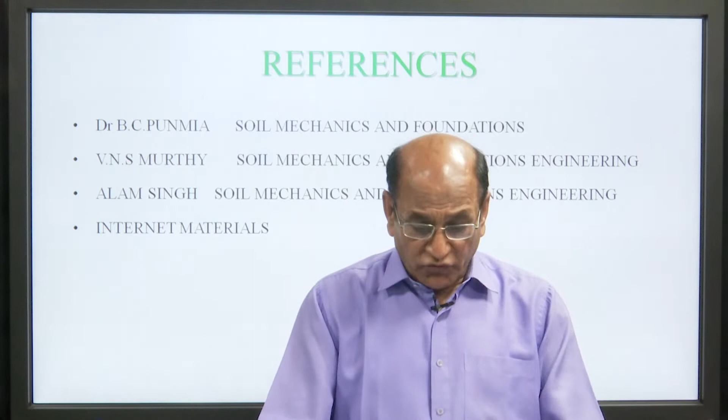References that I have taken: Dr. B.C. Punmia, Soil Mechanics and Foundation; V.N.S. Murthy, Soil Mechanics and Foundation Engineering; Alam Singh, Soil Mechanics and Foundation Engineering; and some material has been taken from the internet.

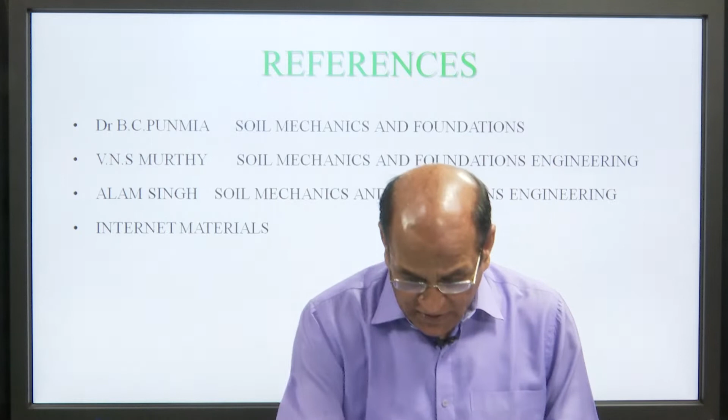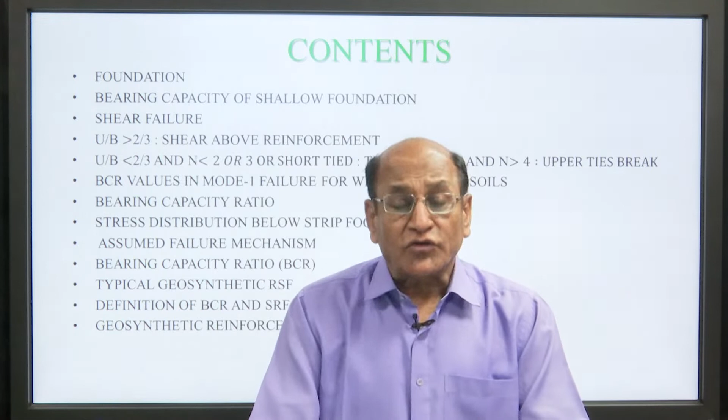The contents: today I will take up foundation, bearing capacity of shallow foundation, shear failure, U by B more than 2 by 3, shear above reinforcement, U by B less than 2 by 3, and N less than 2 or 3 or short tied, tie pulled out, and N more than 4 upper tie break.

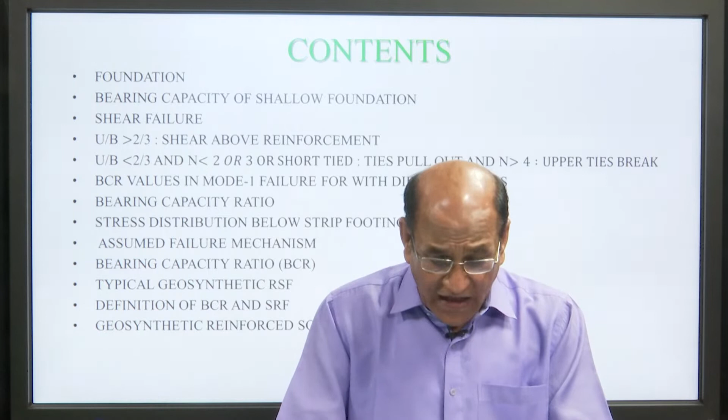BCR value in mode 1 failure for different soils, bearing capacity ratio, stress distribution below strip footing, assumed failure mechanism, bearing capacity ratio, typical geosynthetic, SRF, geosynthetic reinforced soil foundation.

First of all, we will take up foundation. Foundation is a part of a structure that transmits the weight of the structure and load to the ground.

This is the foundation which distributes the load in a larger area, so that the stress developed is lower. The soil does not fail in shear, and settlement is within safe limit.

Broadly, they are classified into two categories: first is shallow foundation, and second is deep foundation. A foundation is shallow if its depth is equal to or less than its width.

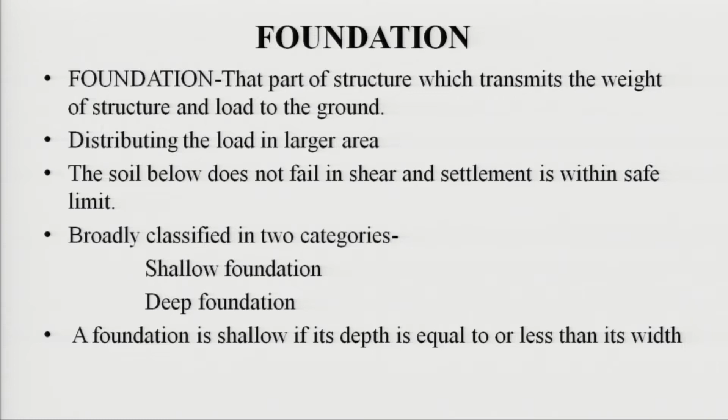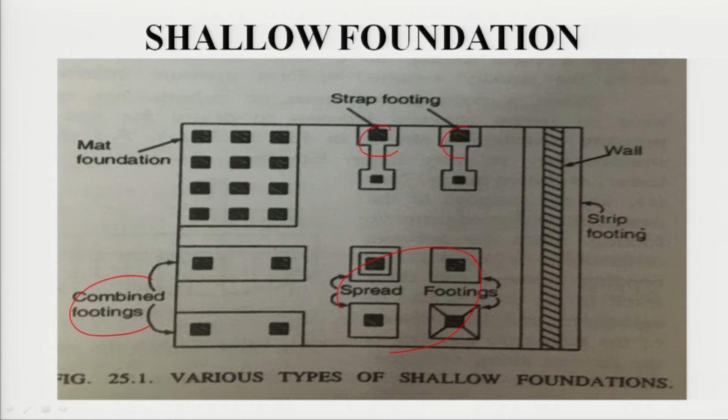We will see in this figure, this is a wall under which there is a strip footing, there is a strap footing like this way, it is quite clear. This is a spread footing like this way. This is a combined footing, combination of all these, and this is a mat foundation, which is provided where the bearing capacity of soil is very low.

Now come to the bearing capacity of shallow foundation. We will discuss Terzaghi's equation for calculating bearing capacity.

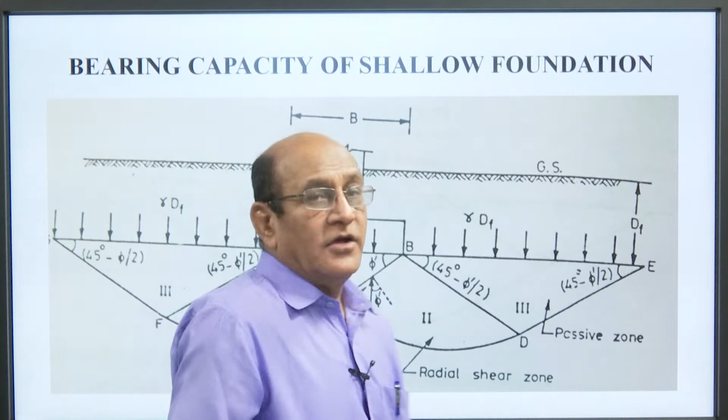Here we can see this is the wall, this is the width of the footing, and here is a loading QU, uniform loads are coming on the soil. There are 5 zones.

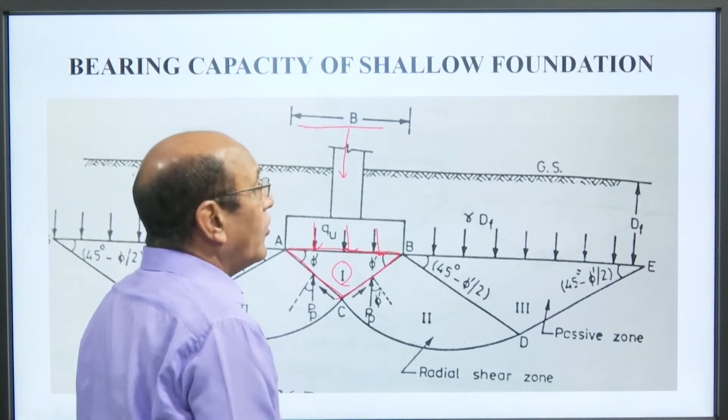The first zone is a wedge type, which is directly underneath the footing. So this is the wedge, and there is no deformation going outside from the edge.

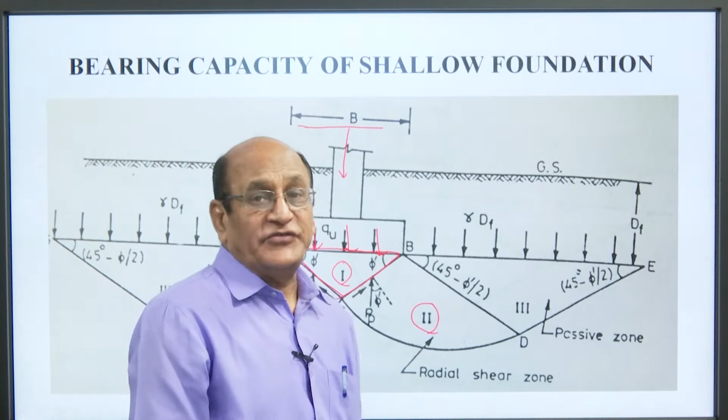Second is the zone of radial shear, in which the radial type of shearing action goes on.

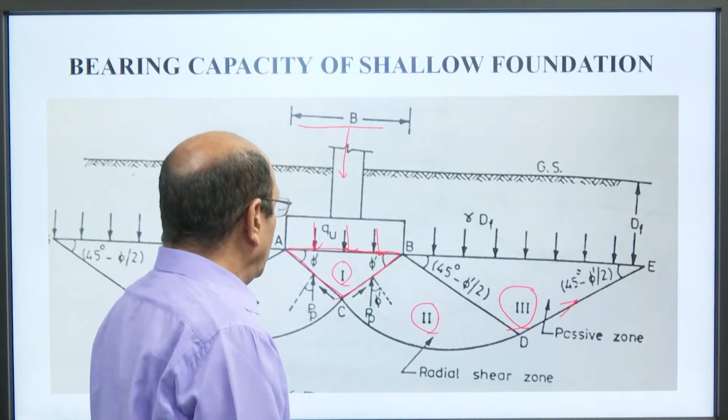The third is a passive zone, in which it works like a linear shear zone. So this is a brief of the bearing capacity of shallow foundation, because whatever we will discuss will be based on this concept.

Now come to the shear failure. The bearing capacity failure is categorized into 3 types. The first is called general shear failure.

The third is punching shear failure, in which the load is coming directly underneath the footing, and deformation or settlement occurs underneath. So we will discuss one by one.

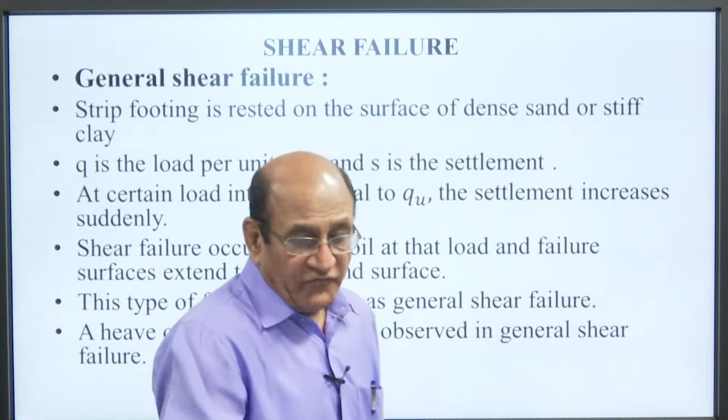First is general shear failure. We can see here, the assumption is a strip footing is rested on the surface of dense sand or stiff clay. Q is the load per unit area, and S is the settlement.

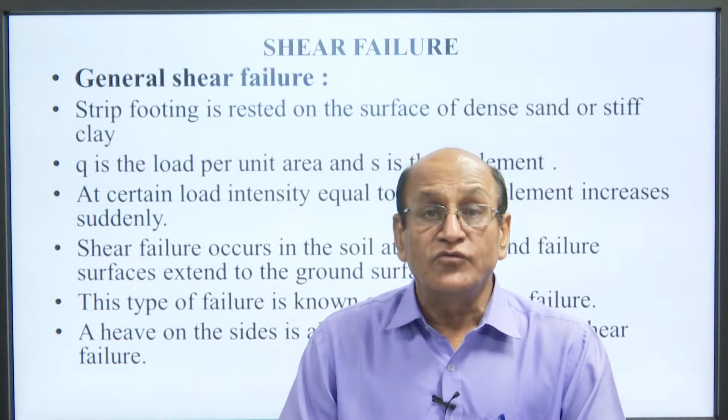At a certain load intensity equal to QU, the settlement increases suddenly. Shear failure occurs in the soil at that load, and the failure surface extends to the ground surface.

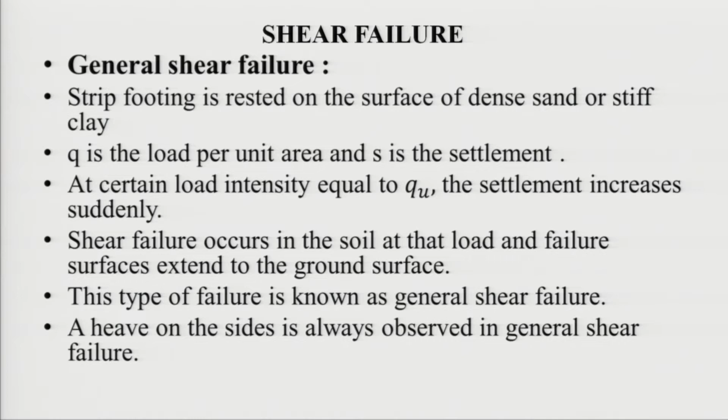This type of failure is known as general shear failure. A heave on the sides is always observed in general shear failure.

So this is about the shear failure. The basic assumption is the footing is rested on the surface of dense sand or stiff clay.

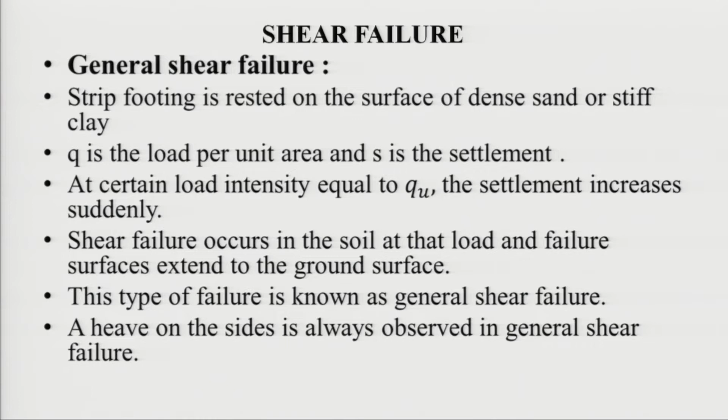Now come to the local shear failure. The strip footing is rested on the surface of medium sand or clay of medium consistency.

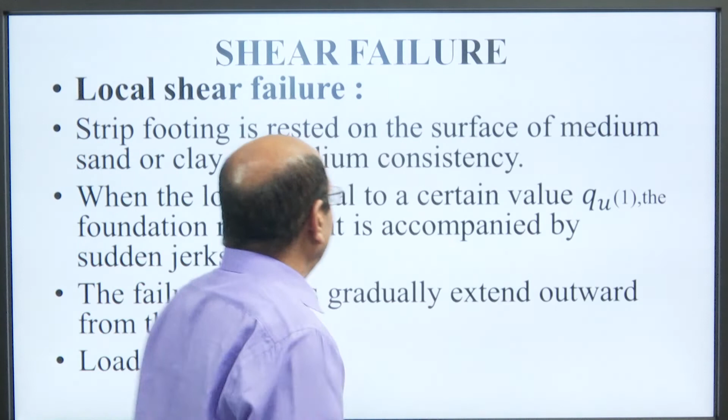When the load is equal to a certain value of QU1, we can see here, this is QU1.

The foundation movement is accompanied by a sudden jerk. The failure surface gradually extends outward from the foundation, as we can see here, extended outside.

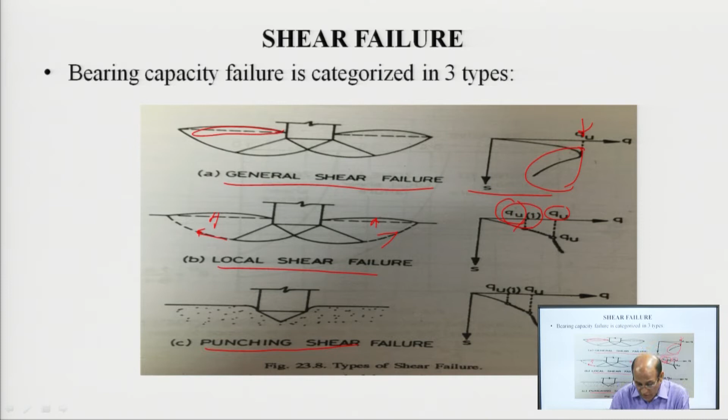In the local shear failure, the failure surface gradually extended outward from the foundation. The load is equal to QU.

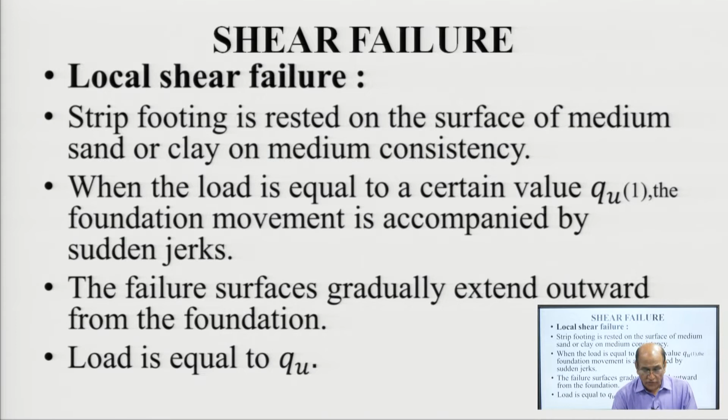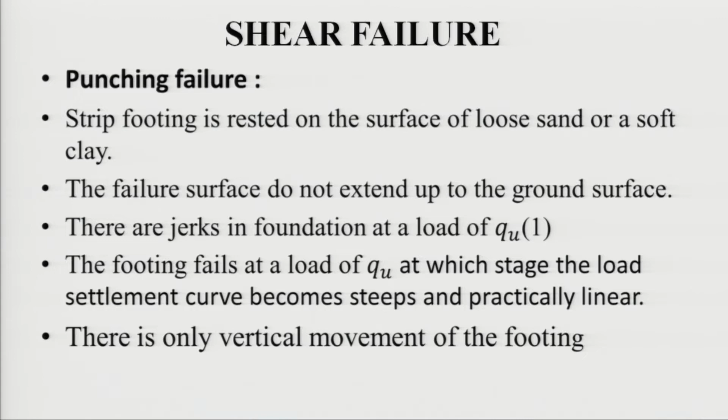Now come to the punching failure. A strip footing is rested on the surface of loose sand or soft clay. The failure surface does not extend up to the ground surface.

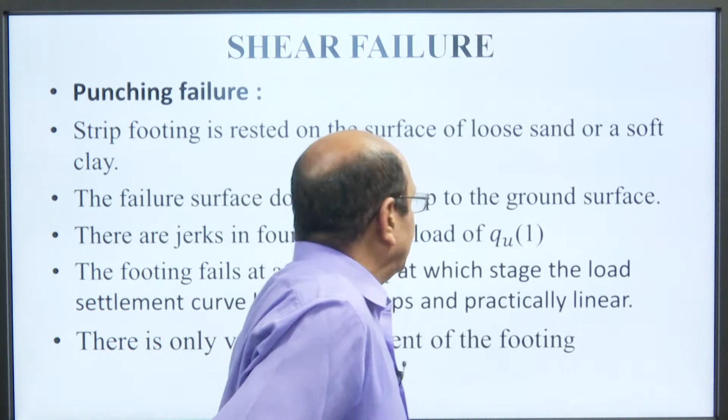There are jerks in the foundation at a load of QU1. Again you can see here, this is the punching failure. So this is the QU1.

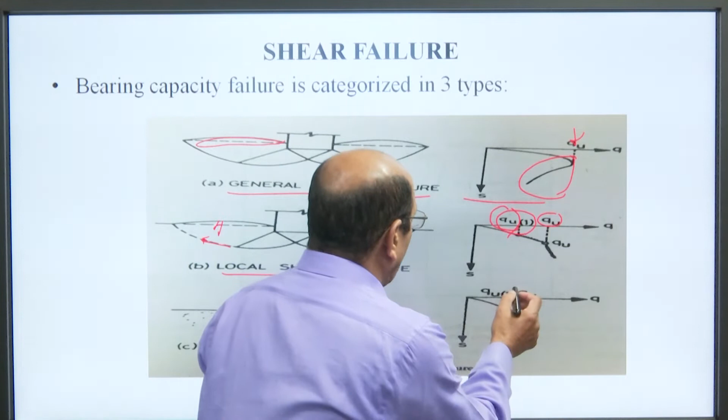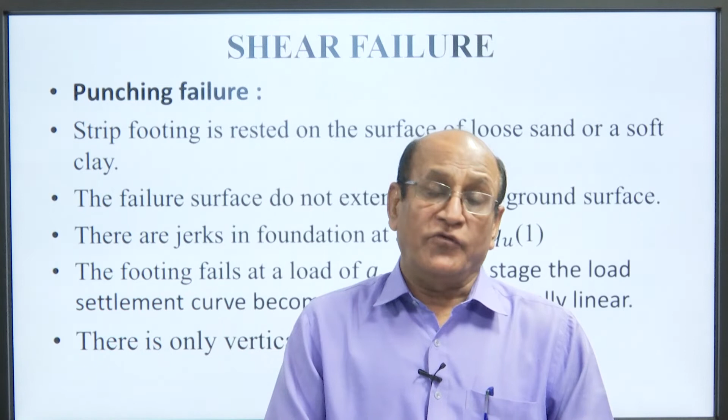The failure surface does not extend up to the ground surface. There are jerks in the foundation at a load of QU1. The footing fails at a load of QU, at which stage the load settlement curve becomes steep and practically linear. There is only vertical movement of the footing, there is no horizontal movement of the footing.

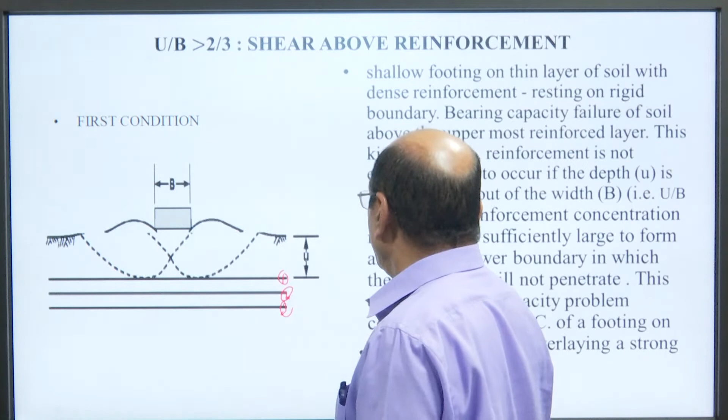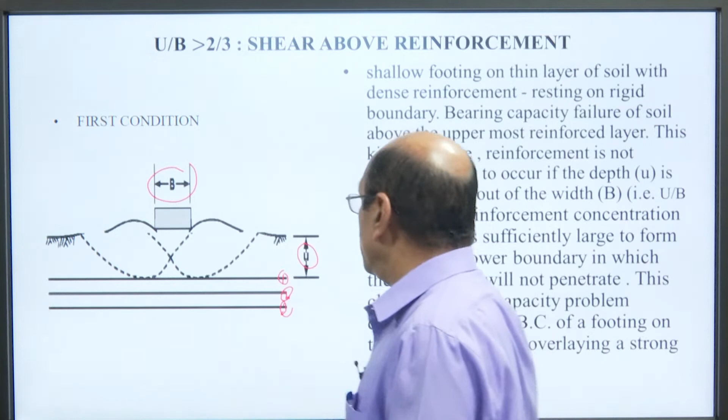We can see here these are the reinforcement provided below the pressure bulb, we can say, and the depth of this first reinforcement layer is U, and this is the width of the foundation. So U by B should be more than 2/3, or you can say 0.67.

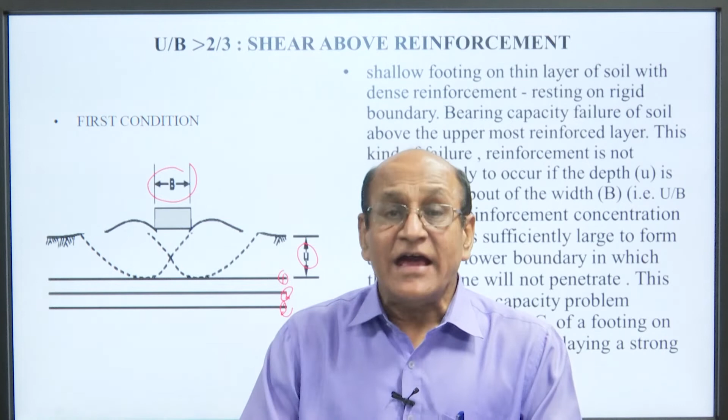So we can see the shallow foundation on thin layer of soil with a dense reinforcement resting on a rigid boundary. Bearing capacity failure of soil occurs above the uppermost reinforced layer.

This kind of failure, reinforcement is not effective, likely to occur if the depth U is greater than about the width, means U by B is greater than 2/3.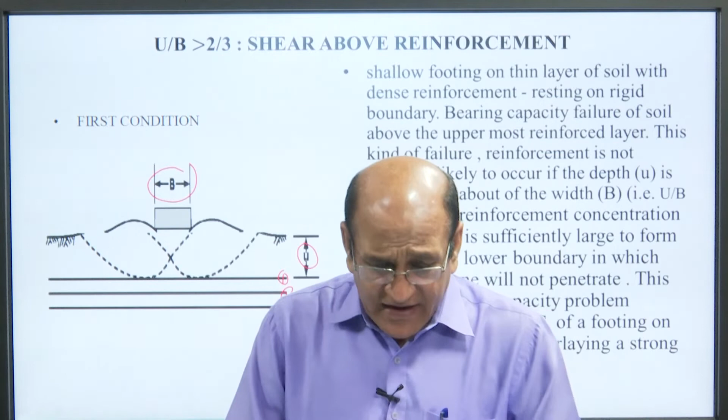If the reinforcement concentration in this layer is sufficiently large to form an effective lower boundary in which the shear zone will not penetrate. This class of bearing capacity problem corresponds to the bearing capacity of a footing on the shallow soil bed overlaying a strong rigid boundary.

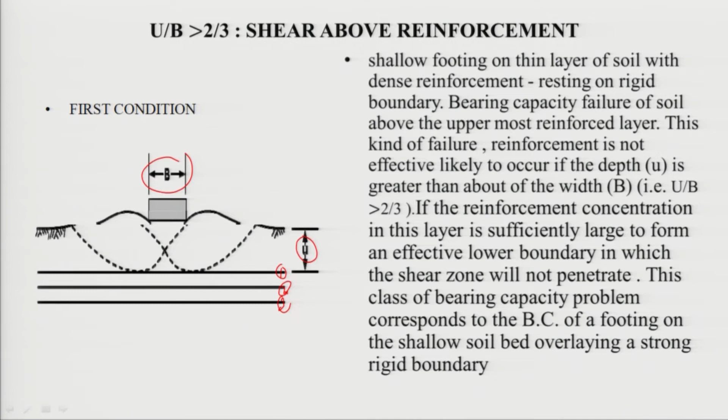Now again, U by B less than 2/3 and N is less than 2 or 3. Here N is the number of bars provided or strip provided.

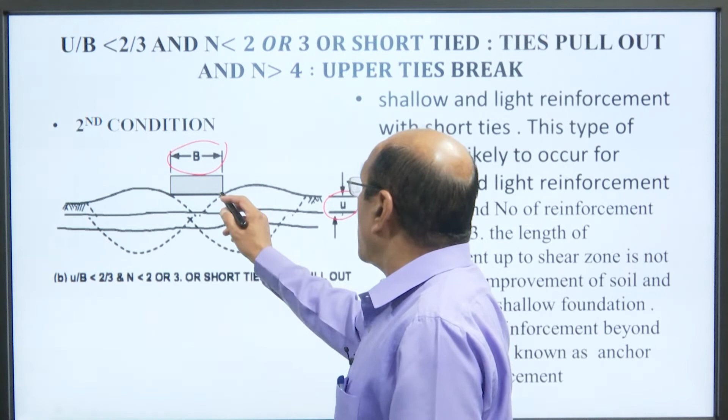The condition again, B is the width, and this is the depth of first reinforcement from the bottom of the foundation. So this is the U. So U by B should be less than 2/3, means 0.67.

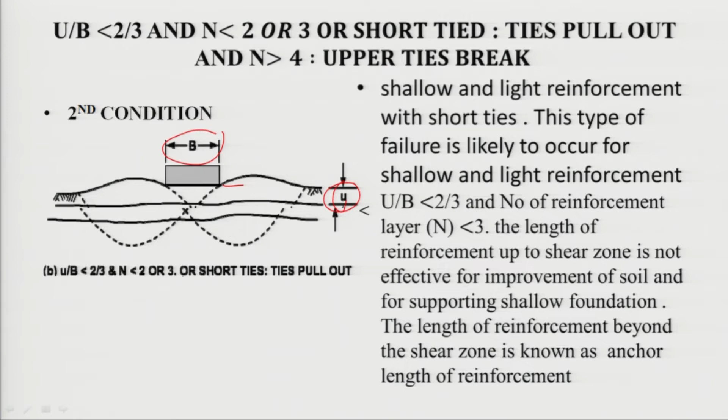So shallow and light reinforcement with short tie, this type of failure is likely to occur for the shallow and light reinforcement, U by B less than 0.67, and number of reinforcement layers N should be less than 3. The length of reinforcement up to the shear zone is

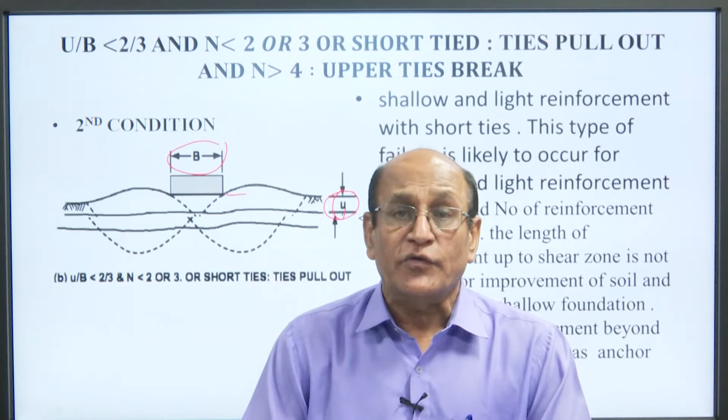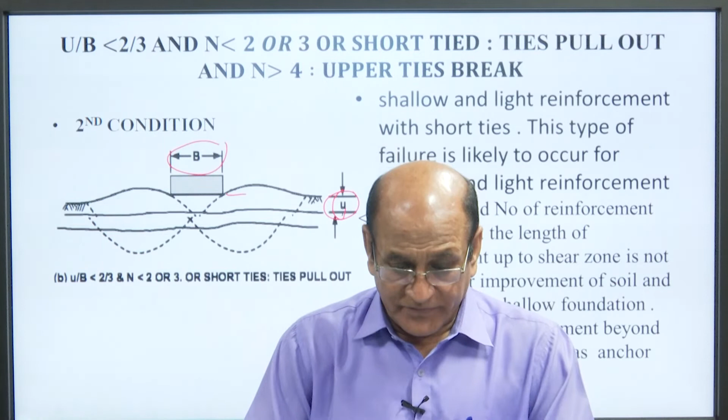not effective for improvement of soil and for supporting a shallow foundation. This length of reinforcement beyond the shear zone is known as anchor length of reinforcement.

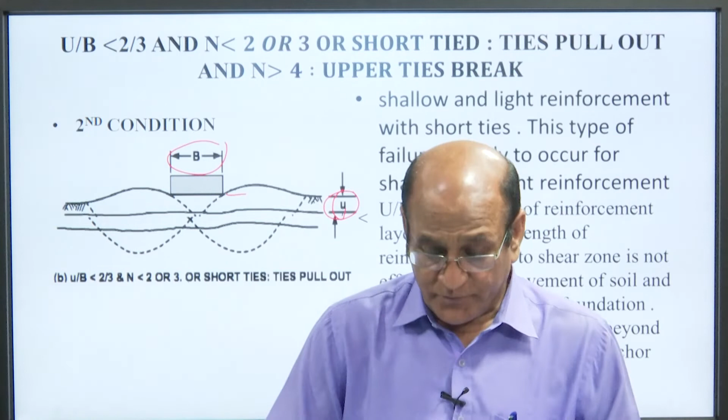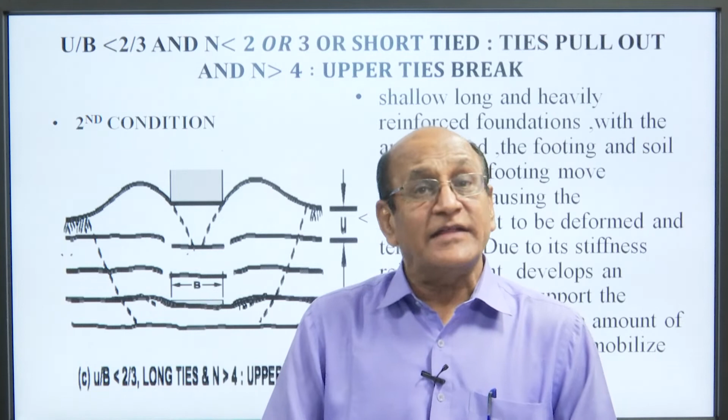Again the same condition, U by B less than 2 by 3 means 0.67, and here N number of bars provided is less than 2 or 3, or short tied, tie pulled out, and in this condition N is greater than 4, the upper ties break.

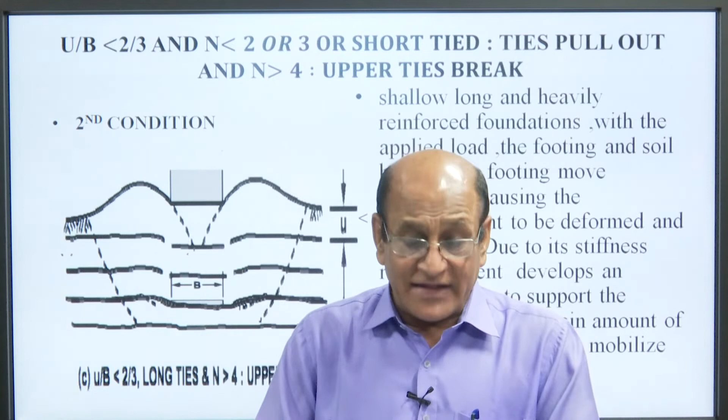So here we will discuss U by B less than 2 by 3 and N is greater than 4. The shallow, long and heavily reinforced foundation: with the applied load, the footing and the soil beneath the footing move downward, causing reinforcement to be deformed and tensioned.

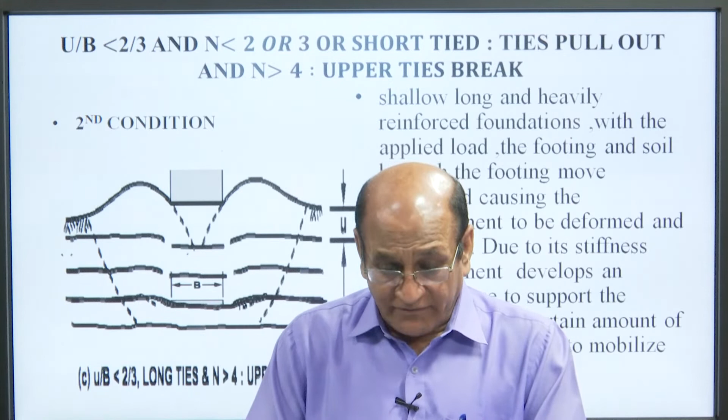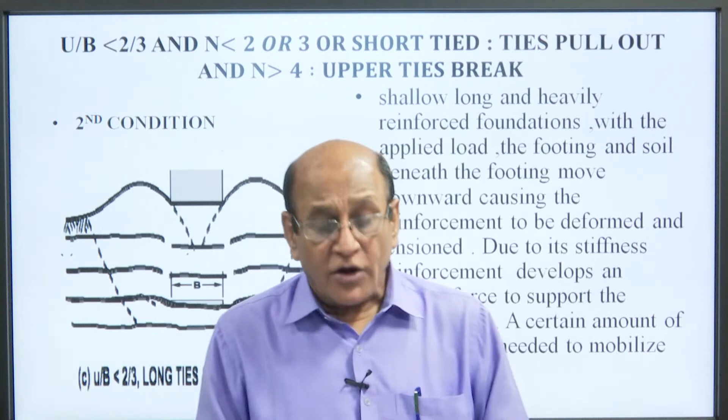Due to its stiffness, reinforcement develops an upward force to support the applied load. A certain amount of settlement is needed to mobilize tension.

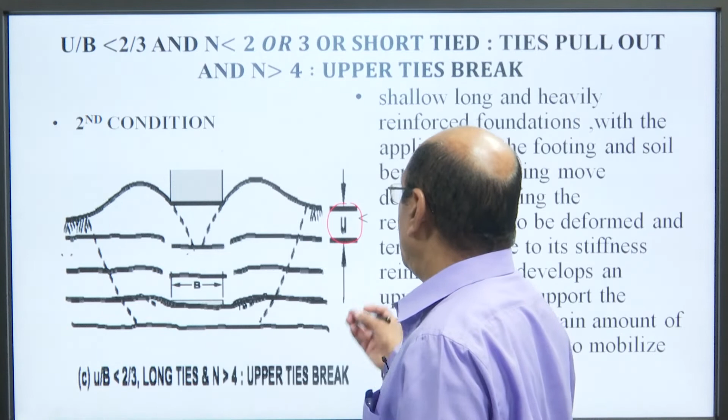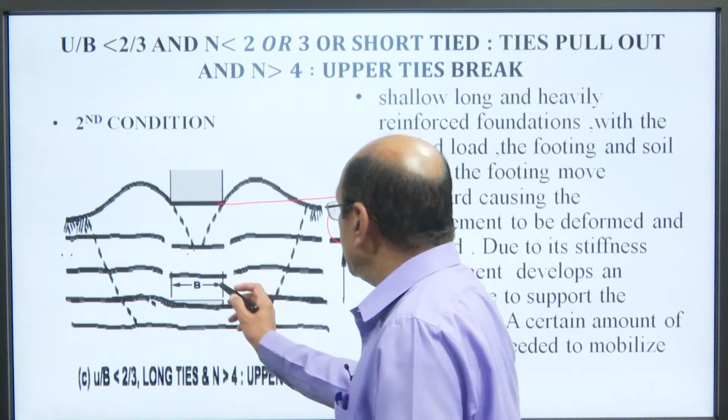We can see here, this is the condition, this is U, means depth of first reinforcement from the bottom of the footing. This is the bottom of the footing, this is the B.

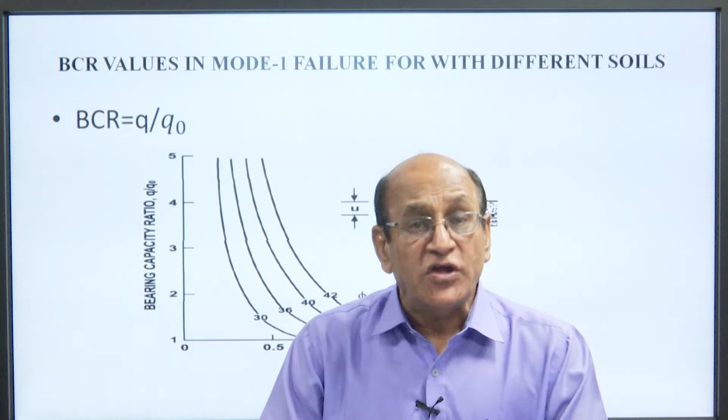Now the BCR value in mode 1 failure for with a different soil. So BCR, bearing capacity ratio, will be equal to Q by Q0.

Here in the diagram or graph we can see, this is the width of the footing and this is U, means the depth of first reinforcement from the bottom of the footing.

So we can see here the bearing capacity ratio Q by Q0 is going very sharply up this way, up to 0.5. Here depth ratio U by B is 0.5, means B is double or 2 times the depth of the first bar from the bottom of the footing. Here U by B is equal to 1.

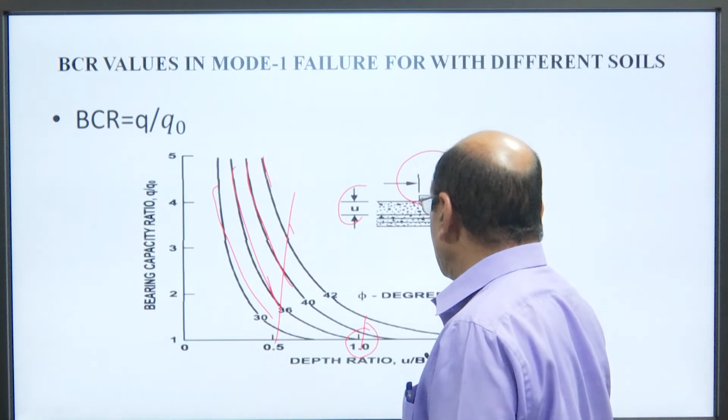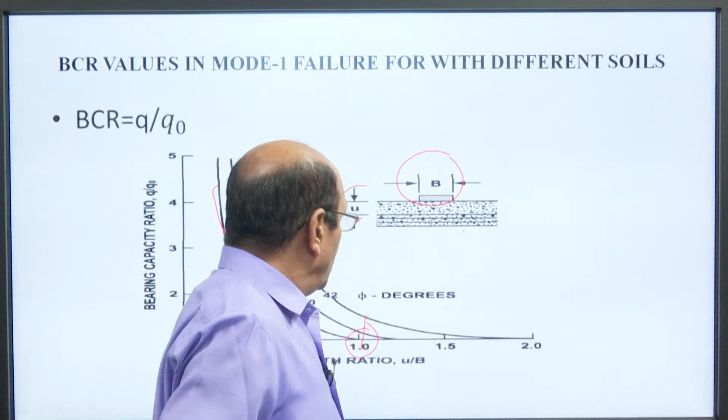Now, bearing capacity ratio.

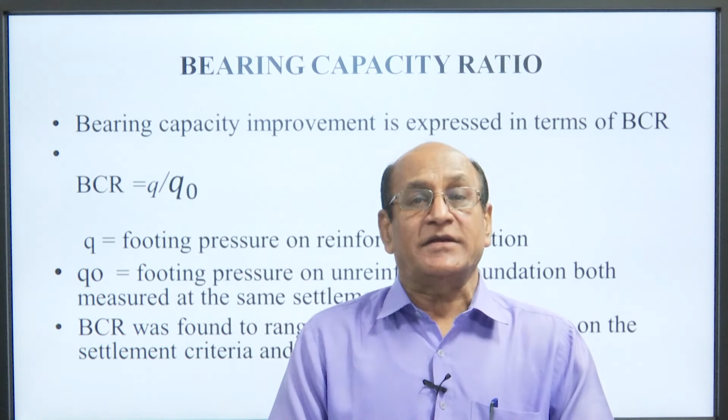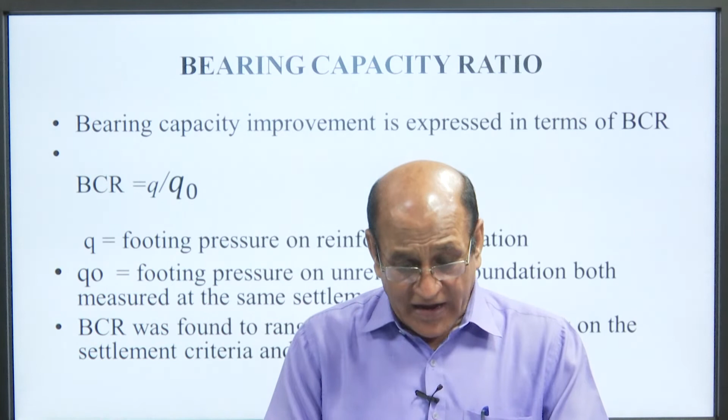Bearing capacity improvement is expressed in terms of BCR, that is bearing capacity ratio, Q by Q0. Q is equal to footing pressure on the reinforced foundation, and Q0 is footing pressure on unreinforced foundation, both measured at the same settlement. So BCR was found to range from 1.5 to 4.0 depending on the settlement criteria and the density of reinforcement.

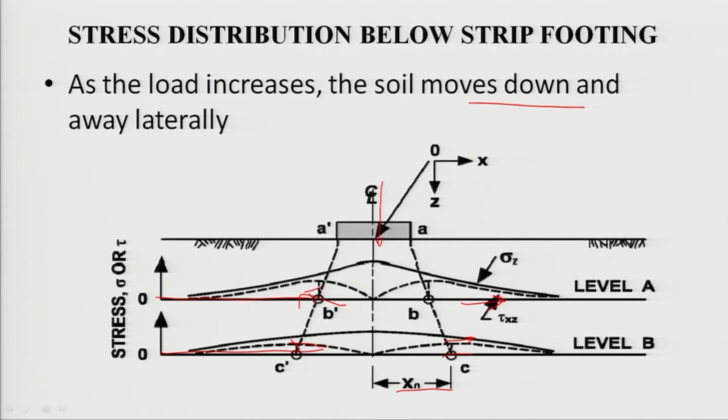So here as load increases, the soil moves down and away laterally, making it like this way.

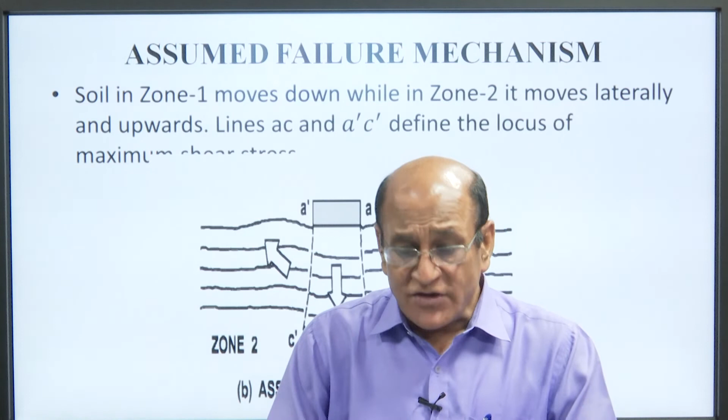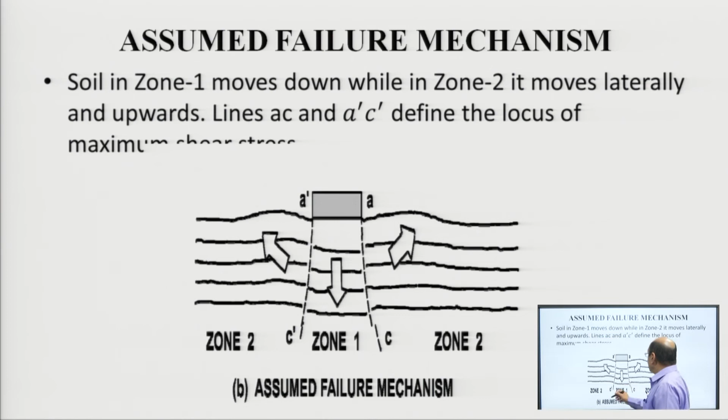Assume a failure mechanism: soil zone 1 moves down while zone 2 moves laterally and upward. The line AC and A dash C dash define the locus of maximum shear stress. We can see here this is A C dash, A dash C dash and A C, this is zone 2, zone 1 and zone 2.

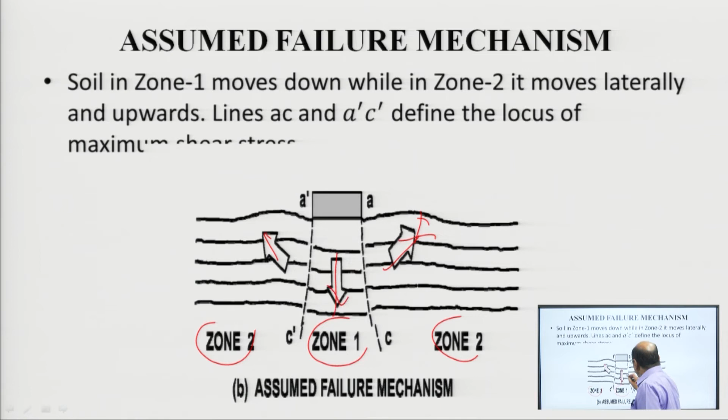So here this will go outside in the upward direction like this way, and this is a direct punching underneath of the footing.

The bearing capacity ratio BCR, two terms were used to evaluate the benefit of using RSF, the reinforced soil foundation. The bearing capacity ratio BCR is defined as the ratio of bearing capacity of RSF to that of unreinforced, and the settlement reduction factor SRF is defined as the ratio of settlement of RSF to that of the unreinforced. Two different types of load settlement behavior were observed in the model footing test.

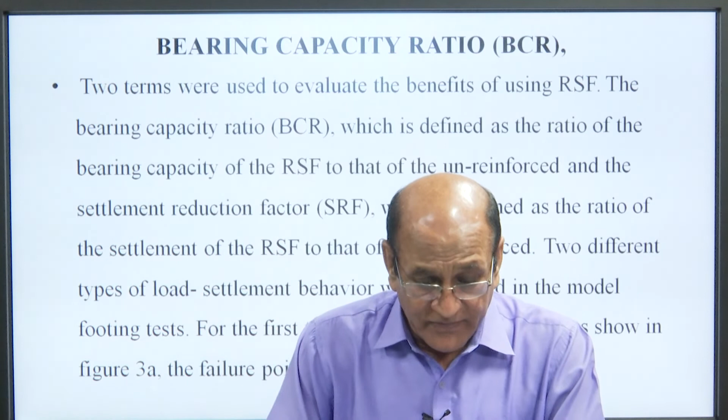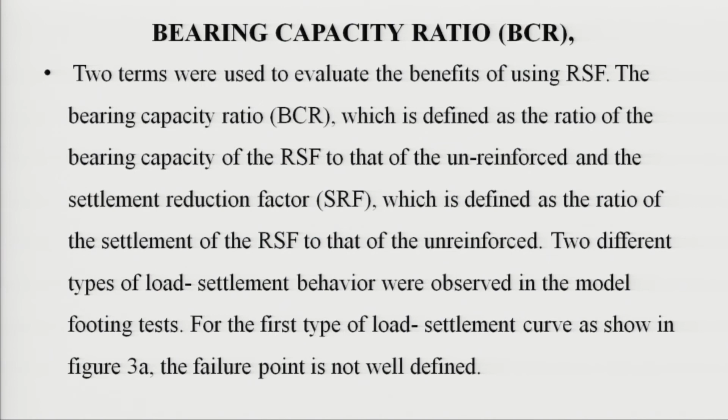For the first type, the load settlement curve as shown in figure 3a, a failure point is not well defined. So this is the typical geosynthetic RSF.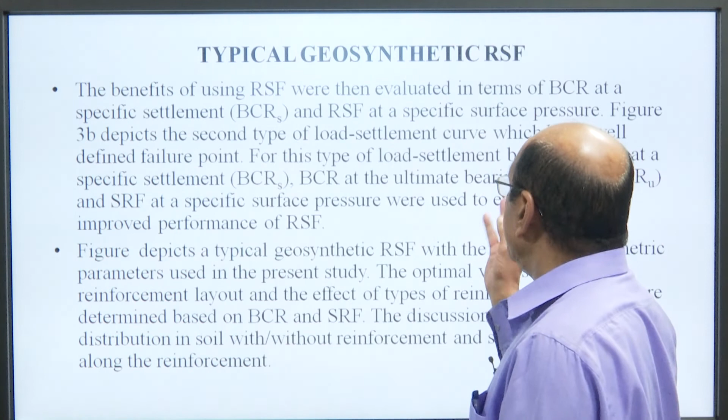We can see here the benefit of using RSF were then evaluated in terms of BCR at a specific settlement, BCRS, and SRF at a specific surface pressure, which has a well defined point.

For this type of load settlement behavior, BCR at a specific settlement, the ultimate bearing capacity BCRU, and SRF at the specific surface pressure were used to evaluate the improved performance of RSF. The figure depicts a typical geosynthetic RSF with the meaning of geometric parameters used in the present study.

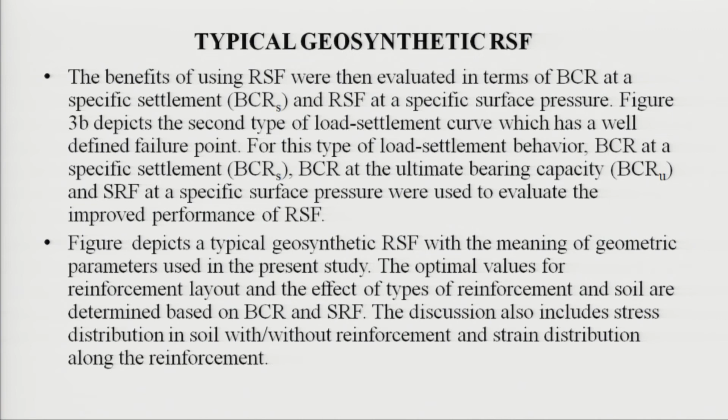The optimal value for the reinforcement layout, and the effect of type of reinforcement and the soil, are determined based on BCR and SRF. Now come to the definition of BCR and SRF.

You can see very easily the load is applied here. This is the value of Q, and this is QR. We can see here this is the unreinforced soil and this is the reinforced soil. So we can see for the same settlement the load carrying capacity is now increased from here to here.

Likewise here also, this is the unreinforced soil, for the same settlement we can put it, this is the footing settlement. So we can see here when it is reinforced soil, the load carrying capacity is now enhanced to QUR, this is the revised reinforced.

So we can see that BCR is QR by Q, and SRF is equal to SR divided by S. So we can see here this is the definition of BCR and SRF.

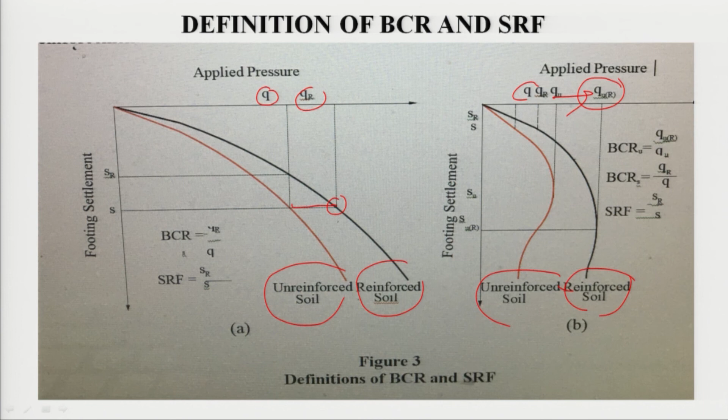Now come to geosynthetic reinforced soil foundation as given in the figure. We can see here this is the layer, there are different layers of reinforcement. This is the width of the footing, depth of the foundation, U is the top layer spacing, and D is the total depth of reinforcement.

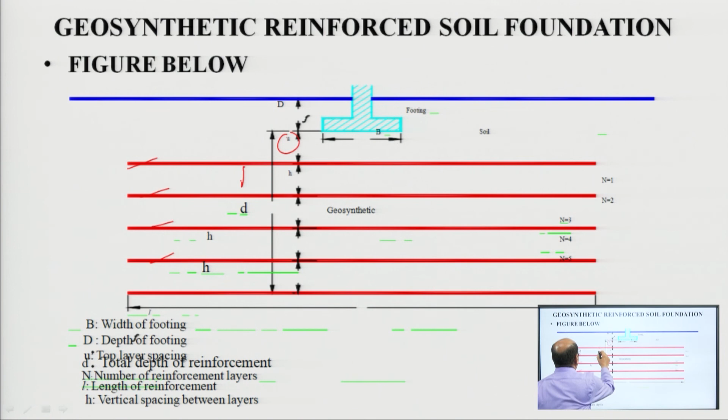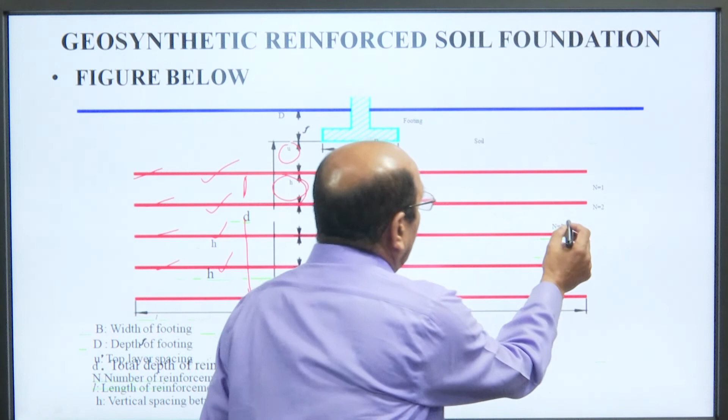The number of reinforcement layers we can easily identify. L is the length of reinforcement, h is the vertical spacing between the layers. So in this way we can analyze, this is n is equal to number 3, n is equal to 4, n is 5, n is 2, n is 1.

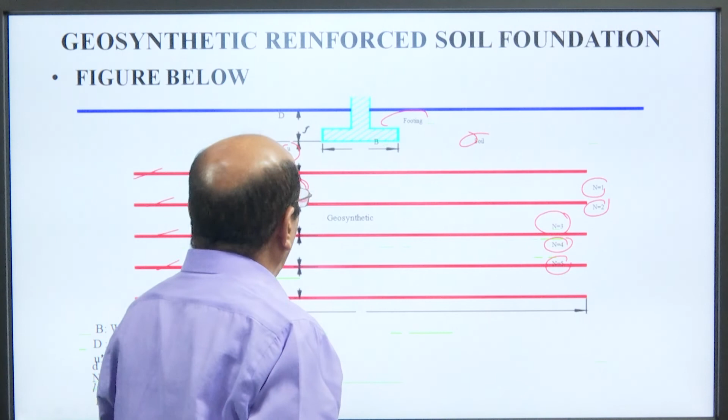So this is the soil, this is the footing. So we can put the reinforcement bar at different layers to just improve the bearing capacity as we have seen earlier. So thank you very much.